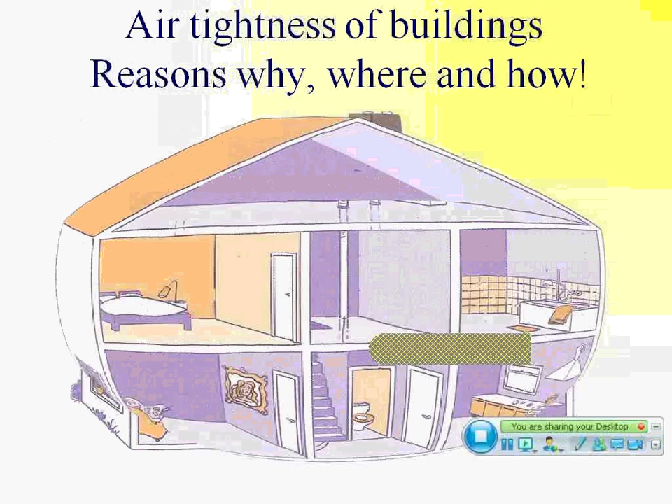Today we have reasons and solutions. This is what I already showed you. If you are pressurizing the house, it's not very stable. But the first question is, why are buildings not airtight? Well, they are not airtight because there is an imperfection in the building envelope during construction. So the construction phase is very important.

Building structures during their lifetime are not rigid and not unchangeable. So that means that the components are moving and are not always in the same place due to building settling, temperature variation over time, and moisture variation over time. And it's difficult to make buildings airtight because of these three things.

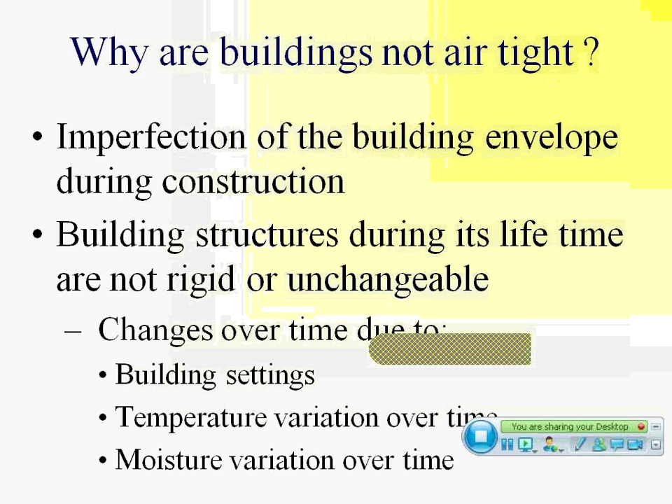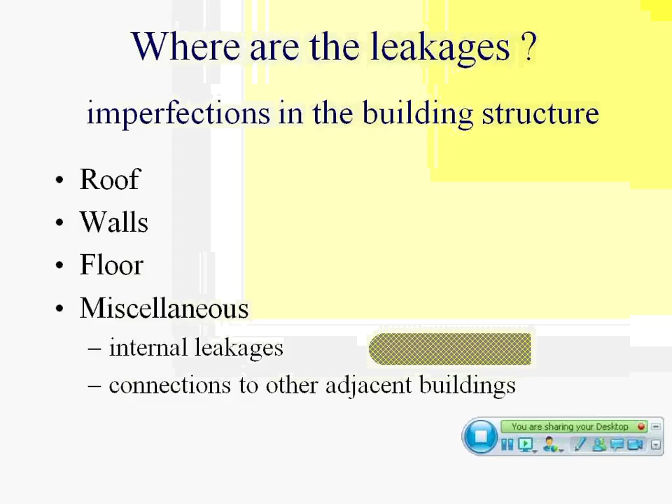Well, where are the leakages? In the roof, in the walls, in the floor, but there are also what we call the miscellaneous leakages, internal leakages between internal components, but also connections to other or adjacent buildings.

If you look to the imperfections in the building structure, if you look to the construction, there's material leakage, although the material itself doesn't leak too much. There are the connections between the building elements. We have cracks or seams of movable windows and doors, and we have penetrations. And we will also focus on penetrations later on, because one of the manufacturers will show solutions for penetrations.

Penetrations can be outlets for ventilation or an outlet for combustion products of the heating plant. The ducting of the sewage or soil pipe in the floor, in most cases, can be a leakage, and electrical connections or electrical wiring.

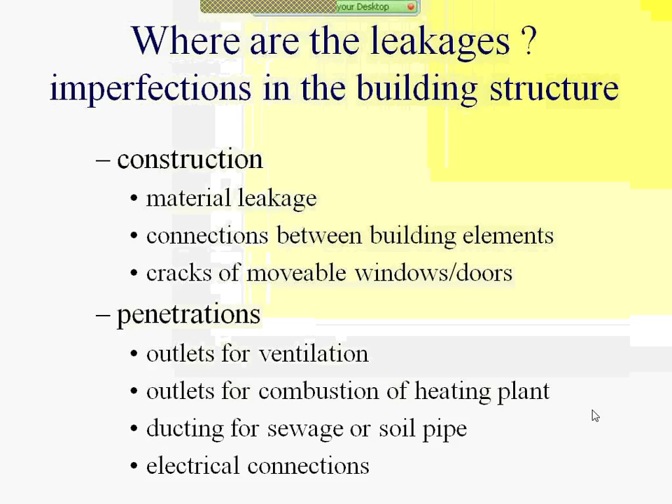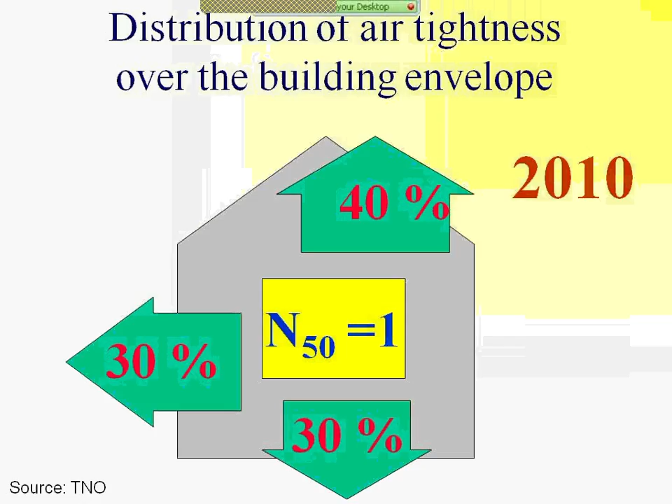This is one I already showed you yesterday, but just to remind you, if you have an N50 of 1, 40% of the leakage in the Netherlands in 2010 was in the roof construction, 30% was in the wall construction, and about 30% was in the floor. Where are these leakages situated?

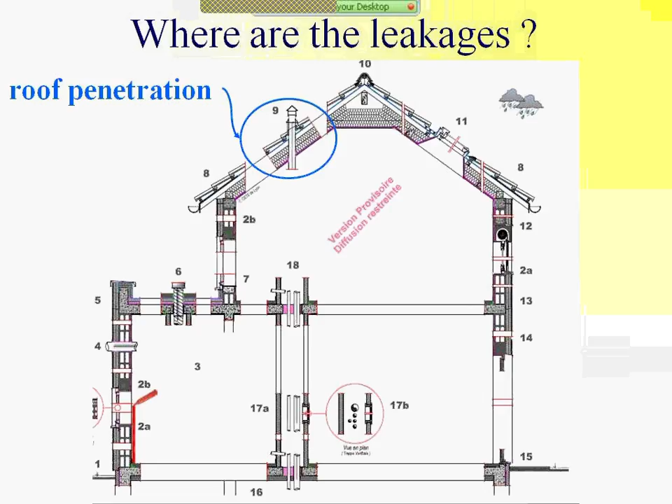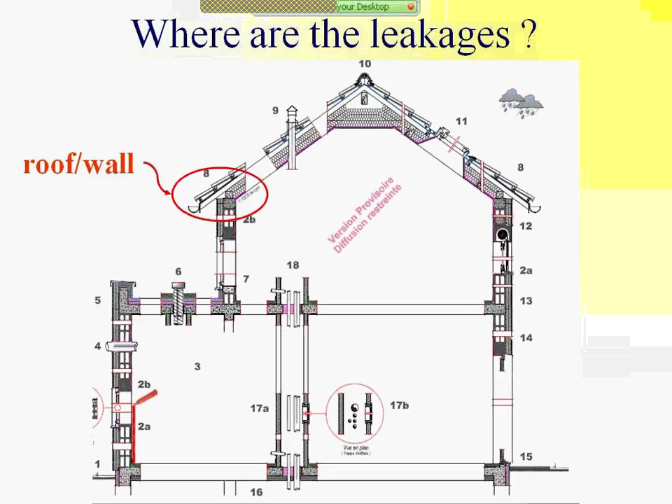This is one of the roof penetrations, so we almost always have penetrations through the roof. And this is sometimes an important leakage, so we need solutions for the roof and the penetration through it. Another important one is the connection between the facade and the roof construction. This detail is very sensitive because it also has to do with quite high pressures and distortion due to temperatures and so on.

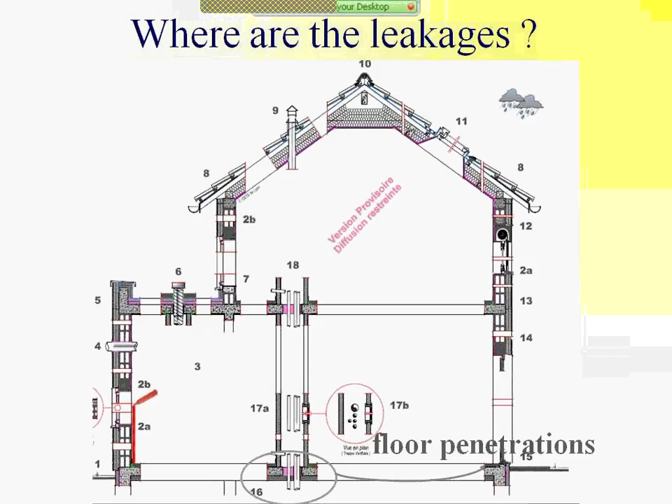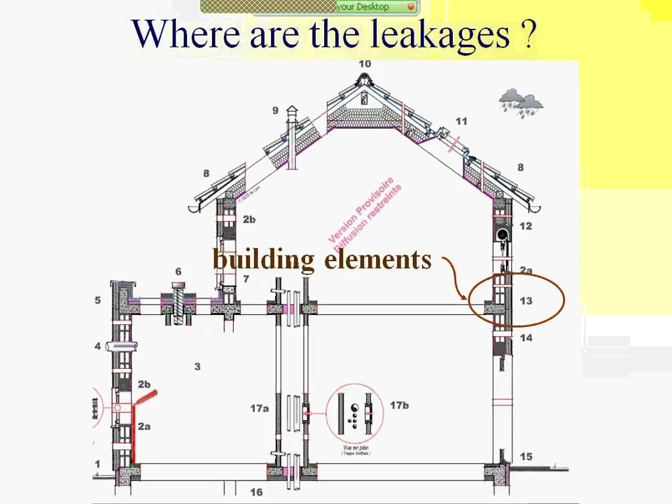Floor penetrations are also important. Sometimes you don't see them, but there can be important leakages, especially in kitchens and in kitchen cupboards. The connection between the building elements, the floor and the facade, is an important one. So we hope to have some solutions later on from industry for all these examples.

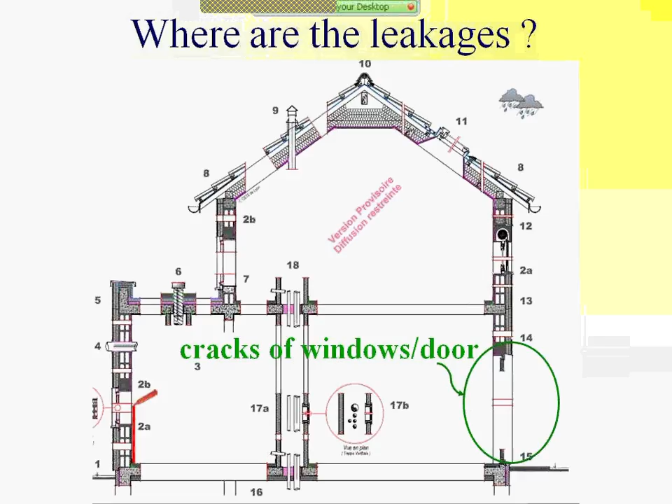And finally, you have the cracks of the movable parts in the windows and doors, which you cannot get rid of because these parts have to move because we have to go in and out. Okay. So, what are the principles of airtightness?

The principles are that we have a flexible sheet or a flexible connection between construction parts. And this flexibility is very important, and it's not always the case that if you have something flexible, it is okay, because the flexibility must be enough to fill the gap also during the settling.

Then we have the flexible closed cell foam between parts, mostly under pressure, to tighten the connections between building parts. You can have flexible kit or putty, flexible things between penetrations and the construction, and there are special seals sometimes developed. I hope we will see something also in the next presentations by industry between the penetrations and the constructions.

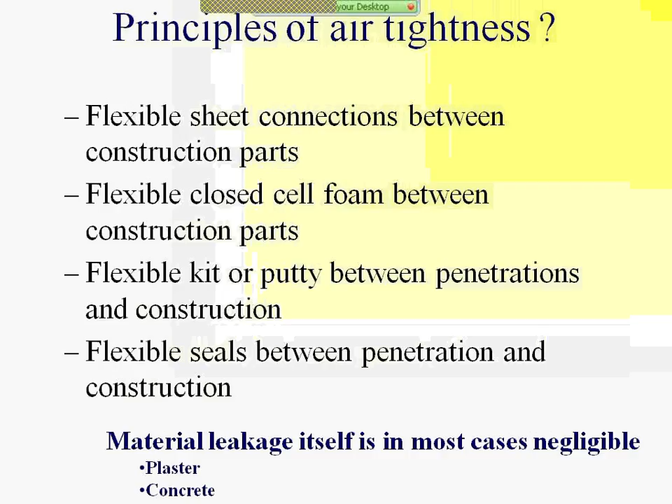The material itself is in most cases negligible. If you take plaster or concrete, the leakage through the plaster or concrete is negligible for the airtightness of buildings. Well, we developed a kind of matrix structure where on the horizontal axis we have the construction type, for instance, blocks where the airtightness is made with plaster, or poured concrete where the concrete itself and the plaster is airtight.

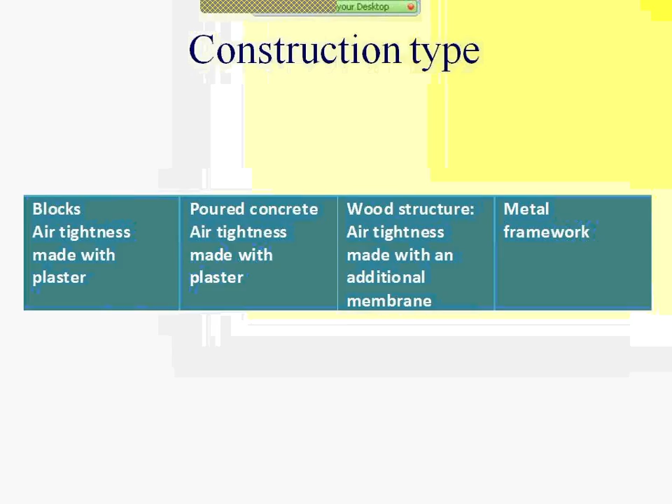We have wood structure, but the airtightness is made with an additional membrane, flexible in most cases, and we have metal framework, and I know that we have some information about that also in this session. And then on the vertical we have the junctions and the penetrations: the junctions between the exterior wall and the cross wall, between exterior wall and floor, roof and gable, window frame and wall frame, and the junctions between the base and the wall.

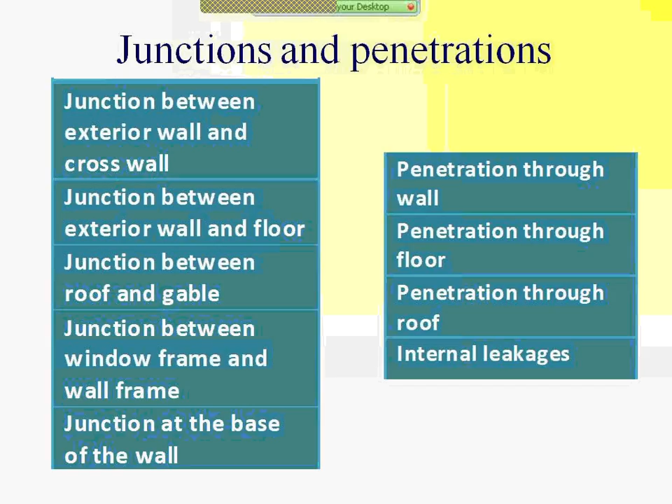And what we hope now is that industry will show us how these gaps can be filled, and what kind of solutions they have for these imperfections in the building structure to overcome the problem of air leakage in buildings. So with that, I finalize my presentation, and we go over to the first industrial presentation.